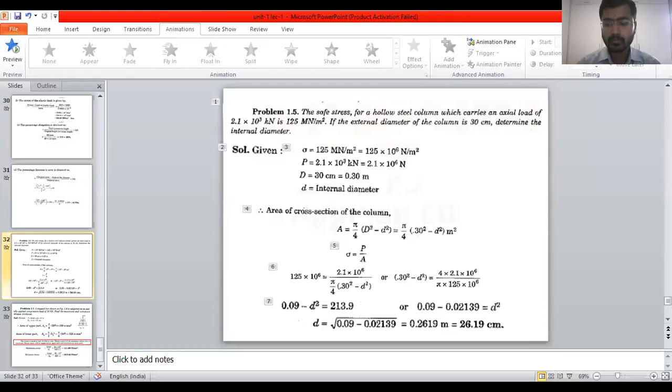Now, the next problem with stresses and strains. Here I have given you a question. The safe stress in a hollow column which carries an axial load of 2.1 × 10^3 kN is 125 MN/m². If the external diameter of the column is 30 cm, determine the internal diameter.

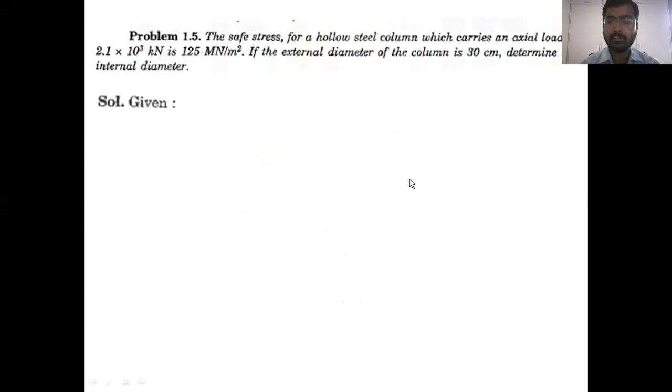He has given us a P value here, and the external diameter. He's asking us to find out the internal diameter. So first we'll write the given data. As I have explained many times, please read the question 2 to 3 times and write the given data first. The sigma value given is 125 MN; mega is 10^6, so I can write it as 125 × 10^6 N/m².

Similarly, the value of P, which is the loading, is given as 2.1 × 10^3 kN. Kilo is 10^3, so 10^3 times 10^3 is 10^6 N. Similarly, we have the diameter. I have converted 30 centimeters to meters, which is 0.3 meters. 1 meter is equal to 100 centimeters, so 30 divided by 100 gives 0.3 meter.

Then we have to calculate our internal diameter. We have the external diameter. This is a hollow circular shape, so we have an outer diameter and an inner diameter. The outer diameter is given, but the inner diameter we have to calculate. So how can I calculate it? Using the area.

Previously we wrote area as π/4 × d². Now here we'll write it as π/4 × (outer diameter² minus inner diameter²). Please be careful: for a hollow circular pipe or material, the area is π/4 (D² − d²). The outer diameter is 0.3 meter; the inner diameter we don't have, so we'll keep it as small d².

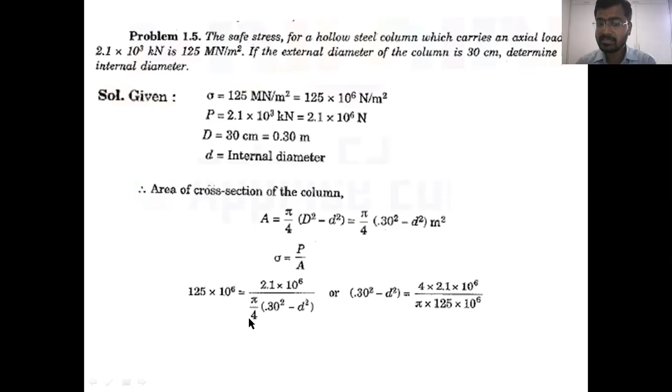So I can write sigma, 125 × 10^6, equal to 2.1 × 10^6 divided by π/4 × (0.30² − d²). I'll bring this 125 × 10^6 down and send π/4 down, so we are left with 0.30² − d². Now I'll send d² there and bring this one here.

So 0.09 minus d² is equal to 0.0213. When you simplify, d is the square root of 0.09 minus 0.0213, so we have 0.2619 meter, or 26.19 centimeters. I think everyone has understood how to calculate the internal diameter.

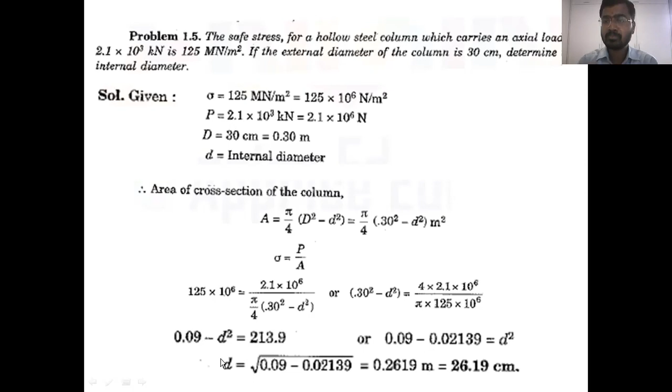So we'll go to one more problem. That will be the last problem for this topic.

Now, what is the next problem we have? A stepped bar shown in figure 1.6. I think you can see the figure 1.6 here. So this is the figure 1.6. A stepped bar shown in figure 1.6 is subjected to an axial load. How much is the axial load we have? Axial load as 35 kilonewton. Now what we have to calculate? Find the maximum and minimum stresses produced. In which bar we have maximum stress and in which bar we have minimum stress.

Now here if you see, we have two bars, a stepped bar. That is the reason here he has given. So this is one bar. So the diameter of that bar is 2 centimeter. Now below if you see, we have one more bar. So the diameter of the below bar is 3 centimeter. So we have to calculate in which bar we have maximum stress and in which bar we have minimum stress. So let us go with the problem.

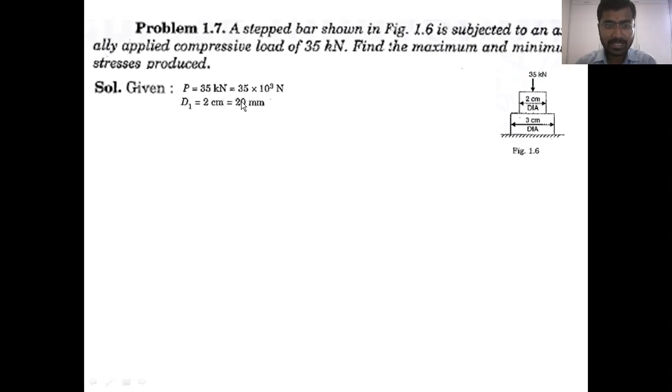Now given data if you see, we know P value, which is nothing but our load, 35 kilonewton we have. So you can convert kilo to 10 to the power 3. And even we have diameter d1. So let us take the first one, which is 2 centimeter. Similarly you can take d2 as 3 centimeter. So if you calculate the area of the first one, area A1, I can write it as pi by 4 into d squared. So d I have converted into mm. So 20 square, which is equal to 100 pi.

Now similarly, if you go with your second one, A2, which is equal to pi by 4 into d2 square. So what is your d2? D2 is equal to 30. So here if you see 3 centimeter, I can write into mm. So 1 centimeter is equal to 10 mm. So I can write it as 3 into 10, which is equal to 30 mm. So I'll be getting it as 225 into pi mm square.

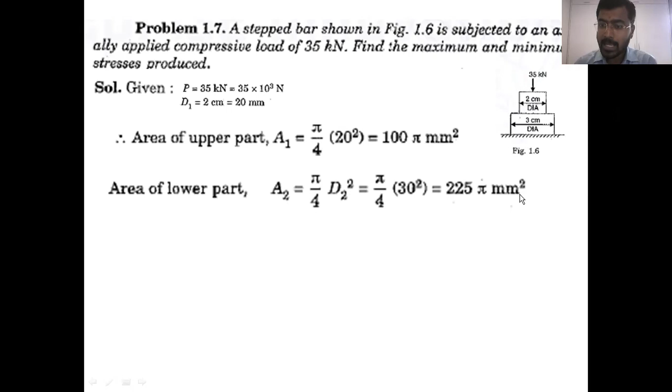The stress is equal to load divided by area. Hence, stresses will be maximum where area is minimum. Hence, stresses will be maximum in upper part and minimum in lower part. Why? Because once again I'll tell you, stress is load upon its area. Stress sigma is equal to P by A. Then stress is directly proportional to the loading, but stress is inversely proportional to the area, which means that if your load has been increased, your stress will increase. If your load has been decreased, your stress will decrease.

But if you take with your area, why? Because area is inversely proportional to stress. I'll tell you, if your area has increased, please be careful, it is inversely. If your area has increased, your stress will decrease. If your area has decreased, your stress will increase. This is inversely proportional. That is the reason.